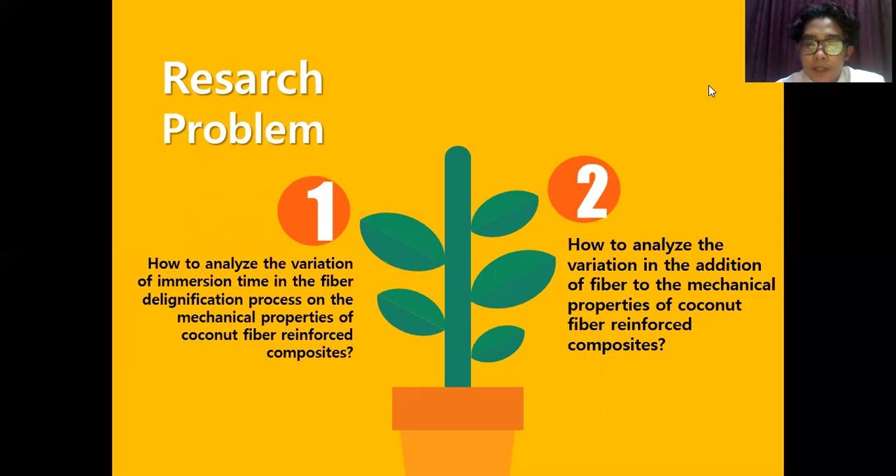Research problem. First, how to analyze the variation of immersion time in the fiber delignification process on the mechanical properties of coconut fiber reinforced composites. Second, how to analyze the variation in the addition of fiber to the mechanical properties of coconut fiber reinforced composite. Research objective. First, knowing the analysis of the variation of immersion time in the delignification process on the mechanical properties of coconut fiber reinforced composite. Second, knowing the analysis of variation in the addition of fiber to the mechanical properties of coconut fiber reinforced composite.

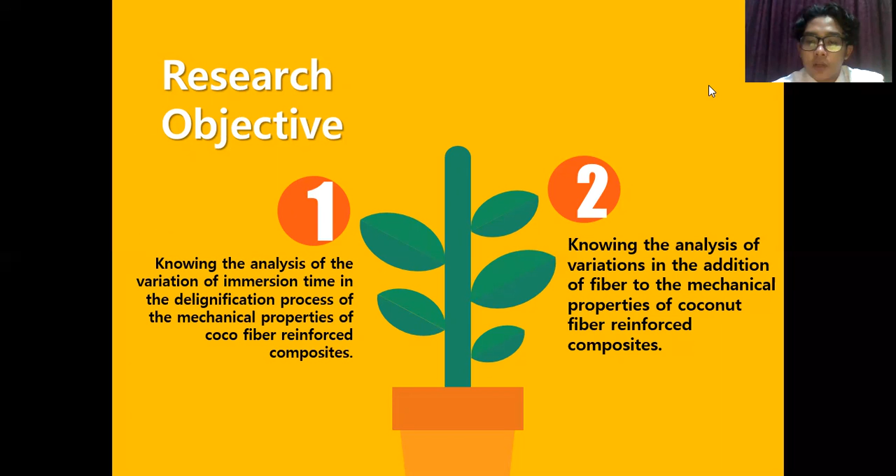Research significance. First, adds value to the benefits of plantation waste. Second, as an effort to develop environmentally friendly material technology based on natural fiber composite. Number three, knowing the process of making composite.

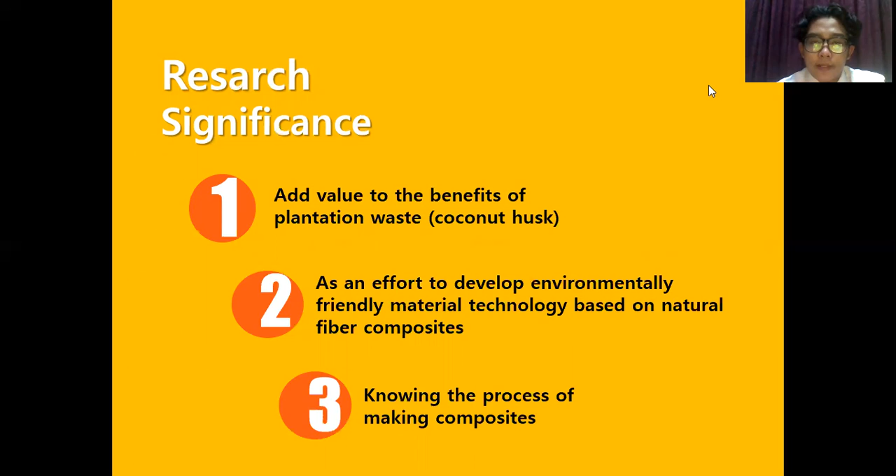Research delimitation. First, the coconut fiber used is taken from Dlodo beach, Tulungagung. Second, the type of matrix used is Yukalac 157 BQTN-EX. Third, mechanical testing is the tensile test. Four, delignification was carried out using the alkaline method and NaOH 5% for 0, 45, 90 minutes. Number five, the percentage of added fiber is 20, 30, and 40%.

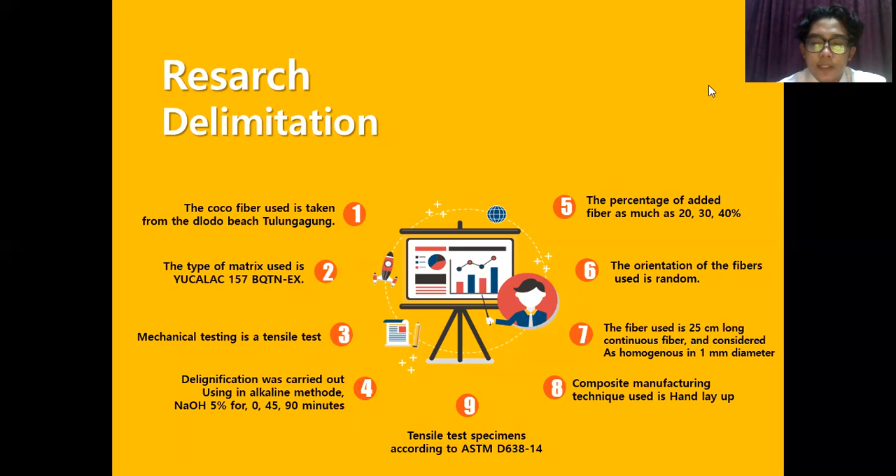Number six, the orientation of the fibers used is random. Number seven, the fiber used is 25 cm long continuous fiber and considered homogeneous in 1 millimeter diameter. Number eight, the composite manufacturing technique used is hand layup. And number nine, tensile test specimen according to ASTM D638-14. Chapter 2, review of related literature.

Okay, in this slide, I'm going to explain the theory that I studied from literature. First, there is composite. Composite is a new type of material, a combination of two or more materials, where the mechanical properties of the forming materials are different. One material is a filler, and the other is the reinforcement phase. Composites consist of two materials, namely fibers and matrix.

Fibers are usually elastic, have good tensile strength, but cannot be used at high temperatures. Whereas matrices are usually ductile, soft, and bond when they reach their freezing point. These two materials with different properties are combined to obtain a new material, which has different properties from the properties of the constituents of the composite.

Next, second, we have matrix. Matrix are resin, which are reinforced binder in the composite, plays an important role transferring stress, protecting the fibers from environment and protecting the fiber surface from erosion. The matrix must have good compatibility with the fiber.

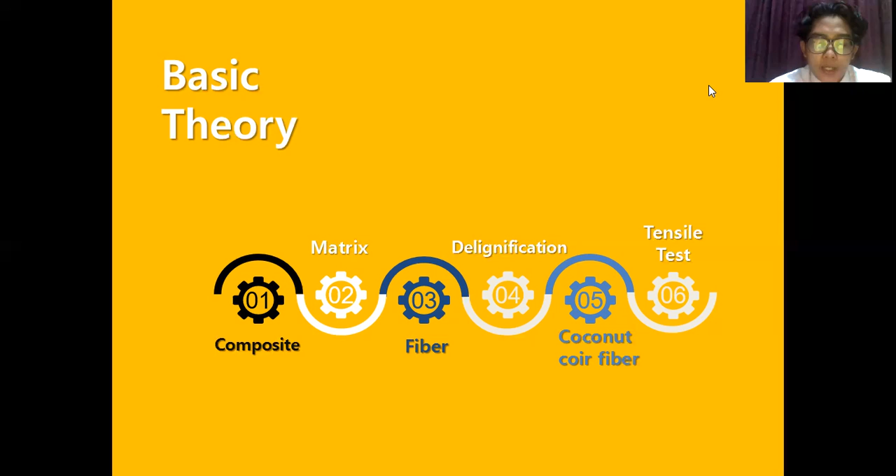The tensile test is done by clamping the specimen, then pulling continuously and regularly until it breaks. In this research, the tensile standard that was used is ASTM D638-14. Next, chapter number 3, research method.

Following the flowchart, the first thing to do is prepare the tools and material. Next, we make the specimen mold, followed by the delignification process of coconut coir fiber by soaking in a NaOH solution with a concentration of 5% for 0 minutes, 45 minutes, and 90 minutes.

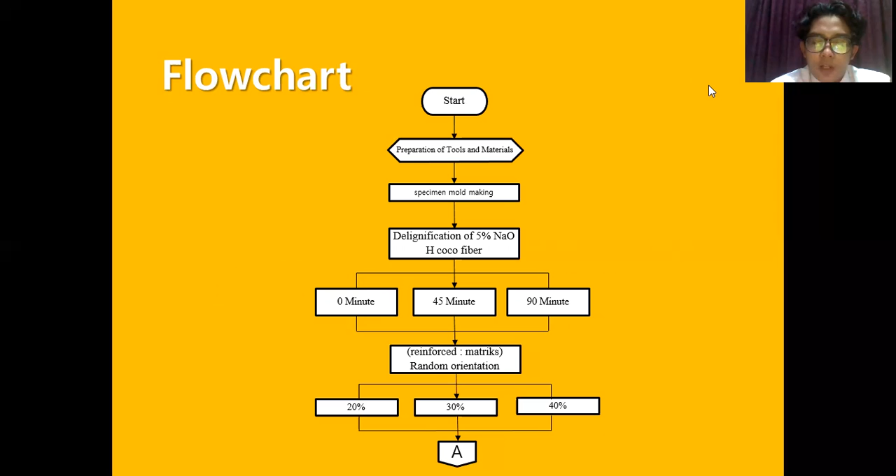Upon reaching the desired time, the delignified fibers were arranged randomly on a mold, then mixed with a variety of fiber and resin compositions with fiber volume fractions of 20%, 30%, and 40%. Composites that are ready and rigid will undergo a tensile test using the ASTM D638-14 standard.

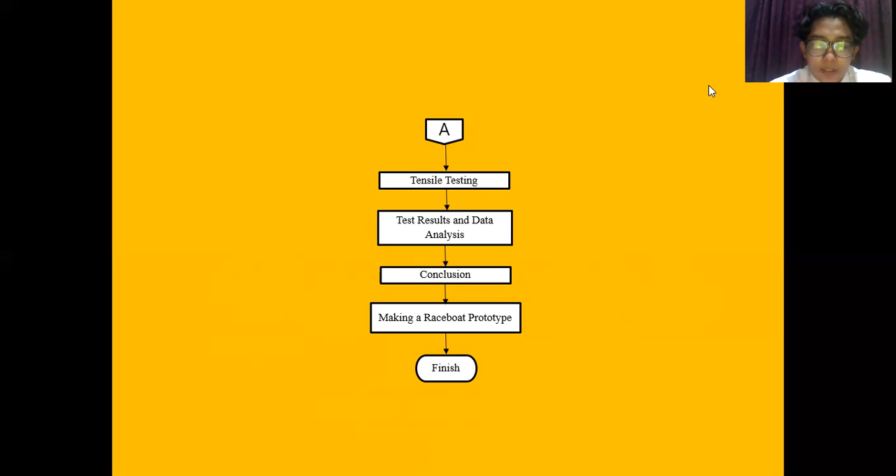Then we do a calculation and analysis to get a conclusion. The best tensile test results were applied to a prototype of natural fiber reinforced boat. Next, research matrix. The variations in this research are the immersion time in the delignification process and fiber composition.

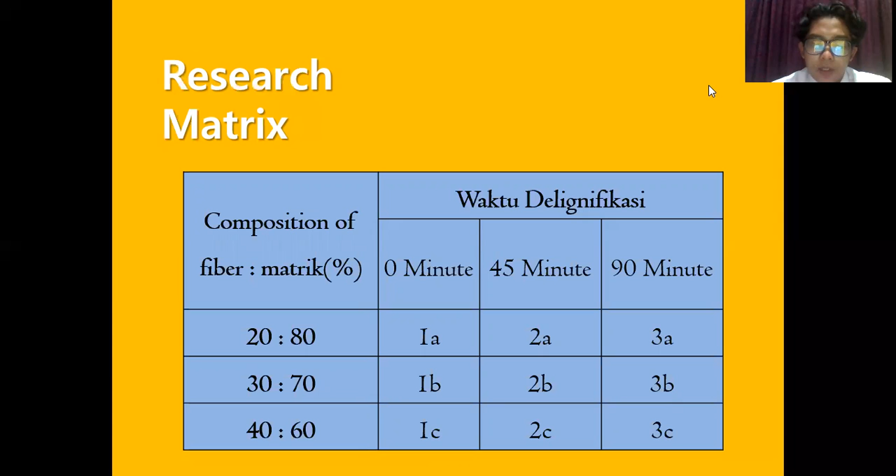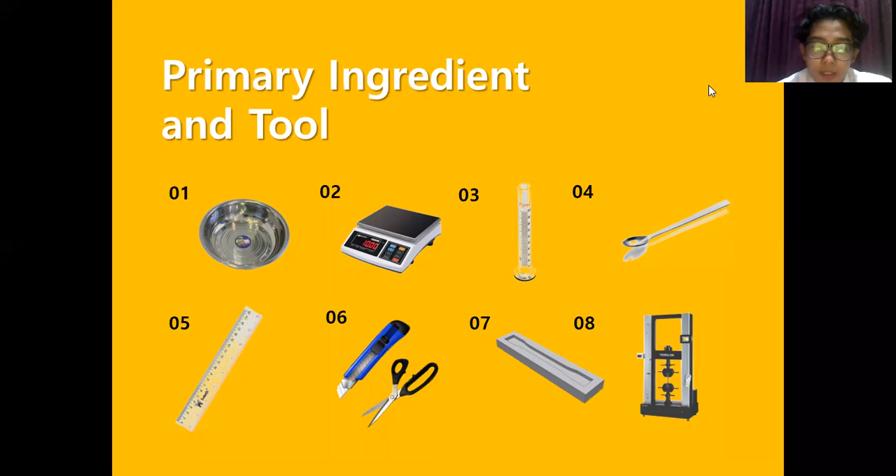These are the main materials and tools in this research. First, basin, digital scales, measuring cup, spatula. There are ruler and cutter, specimen mold, and tensile test machine. And next, we have coir fiber and NaOH, resin, catalyst, and aquades.